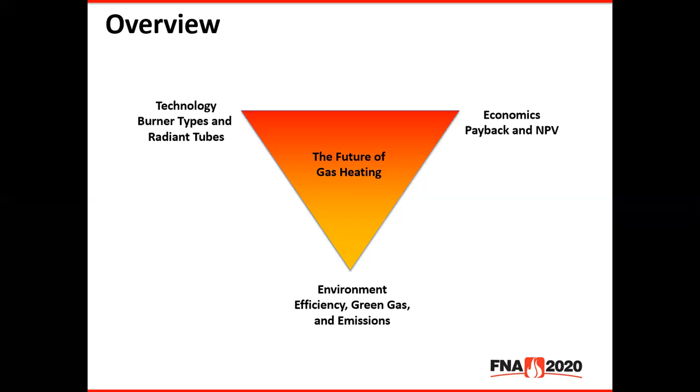Here we have a graph showing combustion efficiency as a function of exhaust gas temperature. For a direct fired burner, exhaust gas temperature is equal to the furnace temperature. For a radiant tube burner, exhaust gas temperature represents the temperature inside of the radiant tube, which is always hotter.

So if we look at the first curve on the bottom, labeled epsilon equals 0, this represents a cold air burner with no combustion air preheat. If we choose a random temperature, such as 1,000 degrees Celsius, we can see that the best possible efficiency for this type of burner is approximately 50%. And that's assuming that everything is in good working order and properly tuned, which is often not the case with some of the older equipment that we see in operation.

Moving up to the curve labeled epsilon equals 0.4, this represents a burner equipped with a plug-in recuperator or a central heat exchanger. With this type of technology, combustion air is preheated to approximately 40% of the process temperature. So at 1,000 Celsius, efficiencies are generally in the mid-60s.

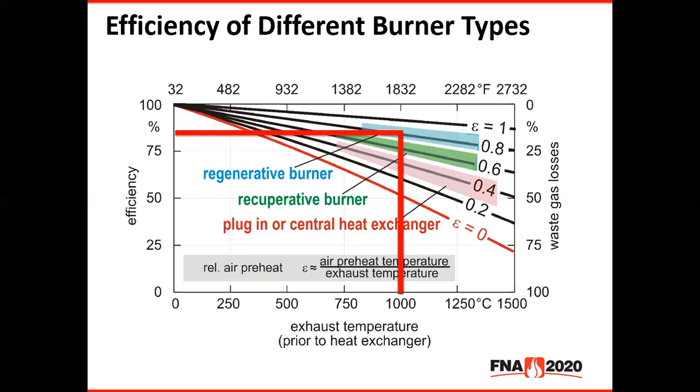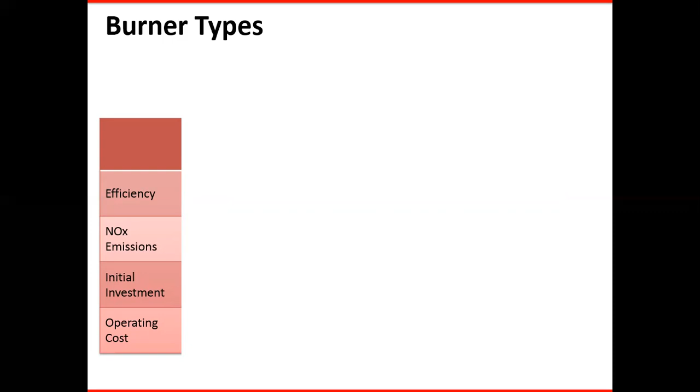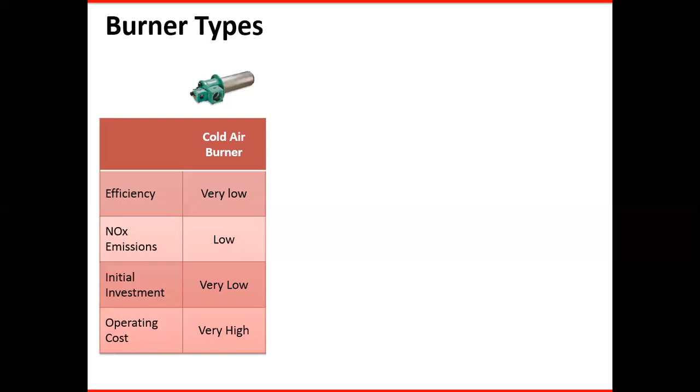Next, we'll compare and contrast some traditional burner types with the modern types. First, we'll look at a cold air burner. The efficiency is very low because there's no combustion air preheat, so consequently, the NOx emissions are also low. The initial cost of the investment is very low because it's simple technology, but the operating cost is very high due to the lack of efficiency.

Next, we'll look at a hot air burner. This happens to be a type equipped with a plug-in recuperator. Due to the mild combustion air preheat, there is some improvement in efficiency, but it is still relatively low. However, NOx emissions are now rather high due to the combustion air preheat. The initial cost of the investment is relatively low, but the operating cost is rather high since the burner is still rather inefficient.

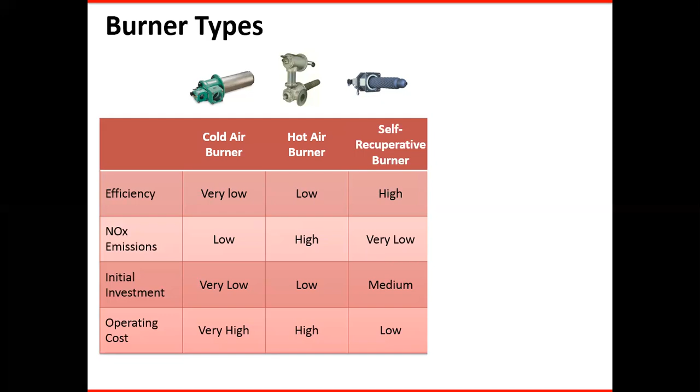Next, we will look at a self-recuperative burner. With this design, the recuperator is an integral part of the burner. It sits directly in the wall of the furnace, which helps to minimize heat losses to the surroundings. So the efficiency of this burner type is high. The NOx emissions can be high, but with proper NOx reduction technology, they can actually be very low. The initial investment is medium, and the operating cost is low due to the high efficiency.

Now we'll look at a burner type that slots in between a traditional self-recuperative and a self-regenerative burner. This burner is actually a self-recuperative type, but it's referred to as gap flow. So instead of having one large heat exchanger, there are many tiny heat exchangers, and this roughly triples the surface area for heat transfer. So it's possible to achieve efficiencies close to that of a regenerative burner, but in a less complicated and somewhat less expensive package.

So the efficiency of this burner type is very high, while the NOx emissions are still very low due to the use of appropriate NOx reduction techniques. The initial investment is high, but the operating cost is very low due to the high efficiency.

Finally, we will look at a self-regenerative burner. Traditional regenerative burners operate in pairs. One burner fires while the other exhausts, and the exhaust products travel through a bed of ceramic media, which serves as a heat storage mechanism. Then when it's the other burner's turn to fire, cold combustion air passes through the bed of media and absorbs the heat from it.

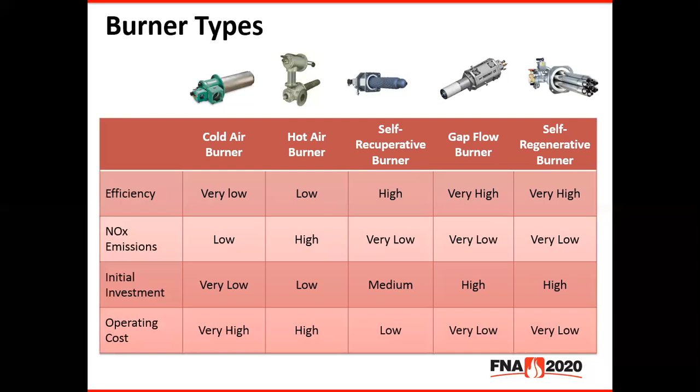Next, we'll look at some modern recirculating radiant tube types. The first is the single-ended radiant tube, and the tube pictured here happens to be a ceramic type. It's constructed from reaction bonded silicon carbide, or SiSiC. This material has twice the heat flux capacity of an alloy, so it can withstand 110 BTU per hour for every square inch of surface area, as opposed to about 55 BTU per hour per square inch for an alloy.

This material does not sag, creep, or distort. It's not required to rotate the radiant tube to counteract sagging, and it's not required to support the end of the tube. Not only is it not required, we insist that you not try to support the tube, because the furnace refractory will expand and contract at a different rate than the reaction bonded silicon carbide, and you could risk cracking the tube. So it should simply be cantilevered inside the furnace, like you see in the diagram.

With a single-ended radiant tube, whether it be ceramic or alloy, it's necessary to use inner tube segments to define the flow path for recirculation.

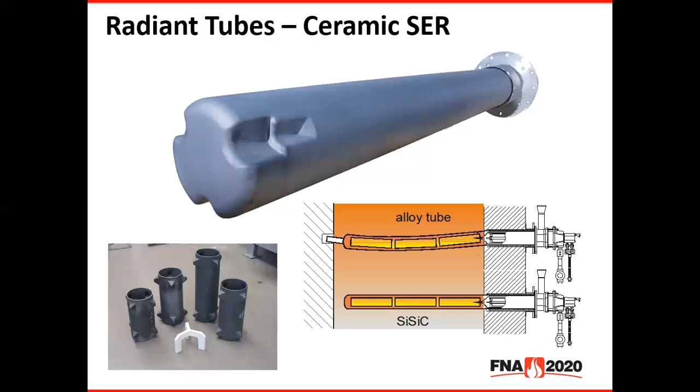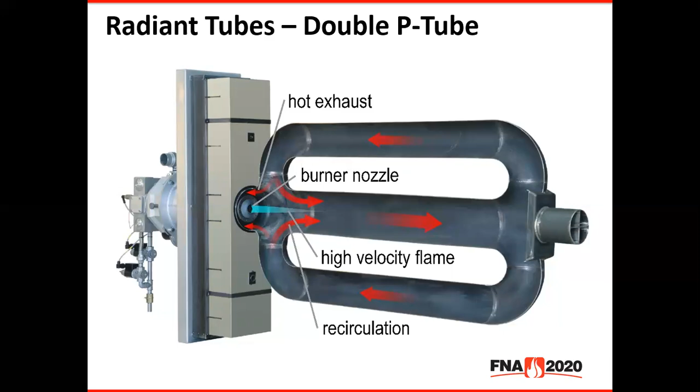Next, we'll look at a temperature uniformity comparison between some conventional tube types versus the modern recirculating radiant tube types. These tests were conducted at the WS laboratory in Renningen, Germany. They placed thermocouples 6 inches apart on each leg of each tube, and the goal was to measure the maximum temperature differential: where it occurred, and how large it was.

First, they tested a W tube, and they found that the maximum delta T occurred in the first leg, and it was approximately 270 degrees Fahrenheit. Next, they tested a U tube, and they saw a slight improvement with a max delta T of approximately 225 degrees Fahrenheit.

After that, they tested the P-type tubes, and they saw a dramatic improvement: delta T max was only about 90 degrees Fahrenheit, due to the internal recirculation inside of these radiant tubes. Finally, they tested the single-ended tube, and the results were the best by far: delta T max was only about 35 degrees Fahrenheit, due to the fact that the recirculation mechanism is compressed into a single leg.

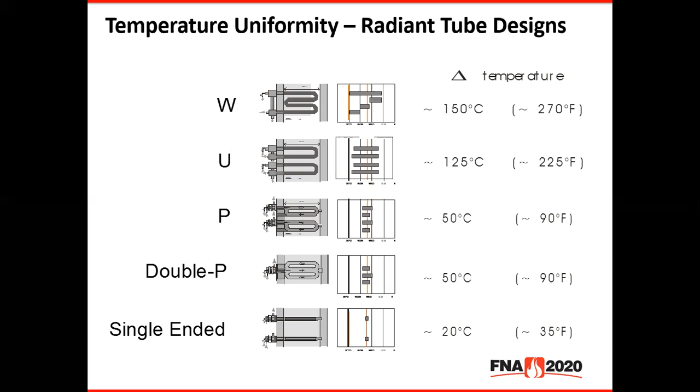Traditionally, there's been a trade-off between efficiency and NOx emissions. In order to achieve high efficiency, it's necessary to preheat the combustion air to high temperatures. This leads to high peak flame temperatures, which are the primary driver for thermal NOx formation. It's an exponential function, so as flame temperatures and furnace temperatures increase, NOx can start to take off very rapidly.

There are a number of techniques which have been around for many decades to help reduce NOx. Some of those are fuel and air staging, which is really the same concept, but you're just playing with a different leg of the fire triangle, fuel versus air. With air staging, which we use in many of our burners, you bring in a portion of the air, mix it with all of the fuel, generate a partial reaction, and release some heat. Then you bring in the rest of the air a little further downstream to complete the reaction and release some more heat. So you're spreading the heat out instead of concentrating it all at one point. This helps reduce peak temperatures and therefore lowers NOx emissions.

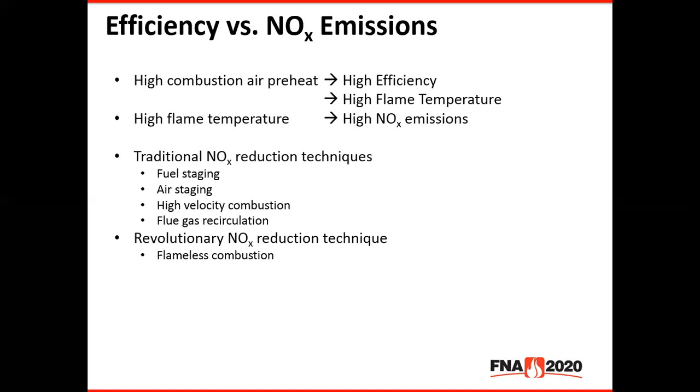The gas and combustion air are pre-mixed with recirculated exhaust products, and a spontaneous reaction takes place, which produces no visible flame. By eliminating the flame from the combustion reaction, peak temperatures drop dramatically, and therefore NOx emissions are suppressed to a fraction of the level possible with the other NOx reduction techniques discussed previously.

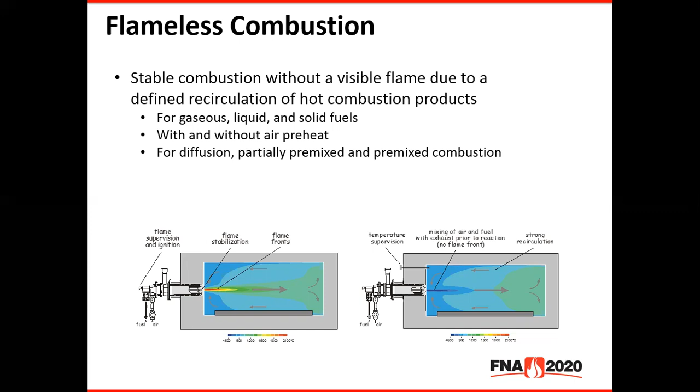Drastic NOx reduction is the primary benefit of flameless combustion, but there are a couple of other advantages as well. By eliminating the hot spot at the tip of the burner, thermal stress is reduced at that point, meaning critical components such as nozzles and electrodes will last longer. And while the temperature uniformity of these modern burner types is already very good due to the high velocity combustion, pulse firing, and internal flue gas recirculation, it's going to get just a bit better by the elimination of that hotspot.

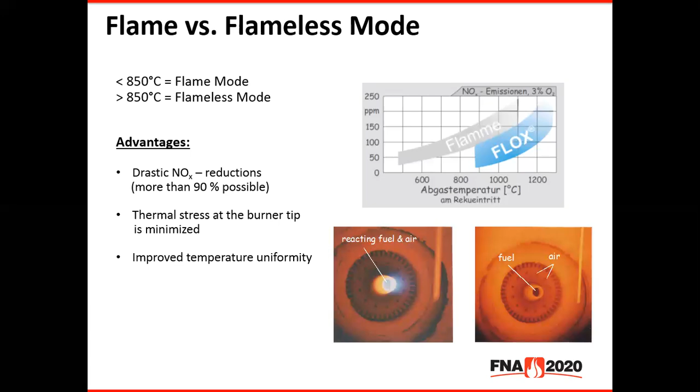Next, we will talk about the move to green fuels.

This graph shows projected specific CO2 emissions over time. As you can see, natural gas combustion currently produces less emissions than electricity. Emissions from the generation of electricity are significant, but they occur upstream at the point of production, so they are frequently overlooked by the end user.

As the graph also shows, we will approach the physical limits for combustion efficiency in the next 10 to 15 years. After that point, further reduction in CO2 emissions will only be possible by the movement to green fuels.

Electricity will also become greener over the next 20 to 30 years, but it is by no means a foregone conclusion that the future will be all electric. Only chemical energy provides unique advantages such as high availability, high energy density, and storage capability. So we feel that chemical energy will be an important part of the green future.

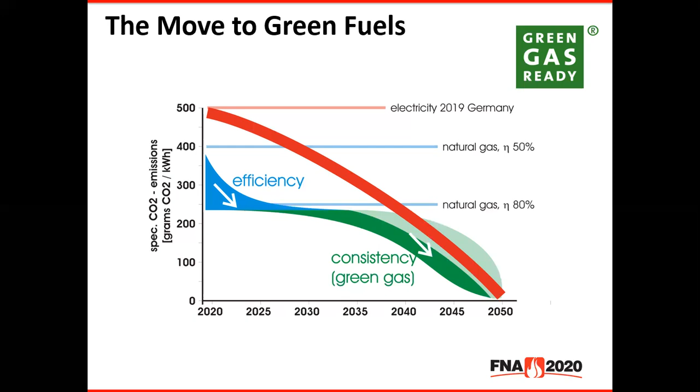Of course, no one knows for sure which energy carrier will play the dominant role, so we all need to be prepared for whatever it will be. At WS, we are currently delivering burners that operate on hydrogen and ammonia, and we will continue to develop new combustion technology to meet future fuel demands.

Now we'll look at a brief economic example. In North America, companies typically look at payback time when evaluating the viability of an investment. Payback time is quite simply the time for the initial investment to be paid back, and that's usually as a result of the fuel savings.

However, we think there is a much better tool for evaluating the viability of an investment, and that would be net present value. It's the sum of discounted cash flows corrected to today's dollars, and in our case, the NPV depends mainly on the generated fuel savings, the initial cost of the investment, the assumed interest rate, and the assumed lifespan of the equipment. Quite simply, the investment with the highest NPV is the most advantageous.

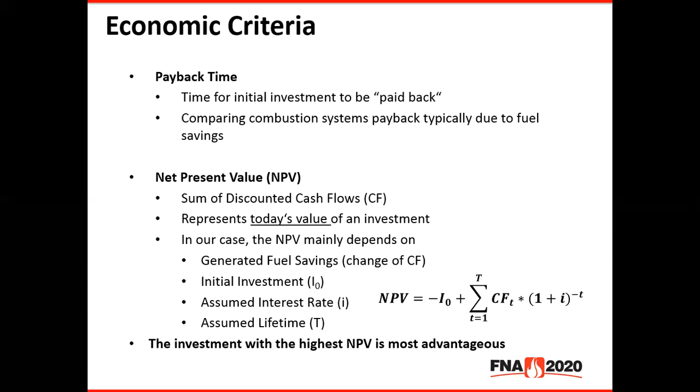So now we'll look at the example. Assume that a company is planning to purchase a new furnace, and the furnace manufacturer has offered a base package and 2 option packages. The base package consists of cold air burners installed in U-tubes, and this furnace is going to operate at around 1650 Fahrenheit, so the assumed efficiency is approximately 55%. As we said, this is the base package, so there is no additional investment.

Now, option package 1 consists of adding plug-in recuperators to the burners and U-tubes. This leads to an improvement in efficiency, and the expected efficiency of this package is approximately 65%. The additional cost for this option is $20,000, and the calculated payback period is 1.33 years.

Now, option 2 is a high efficiency alternative. It consists of replacing the base equipment with self-recuperative burners installed in P-tubes. The expected efficiency from this option is approximately 83%, but the additional investment cost is $80,000, so the calculated payback period is 2.35 years.

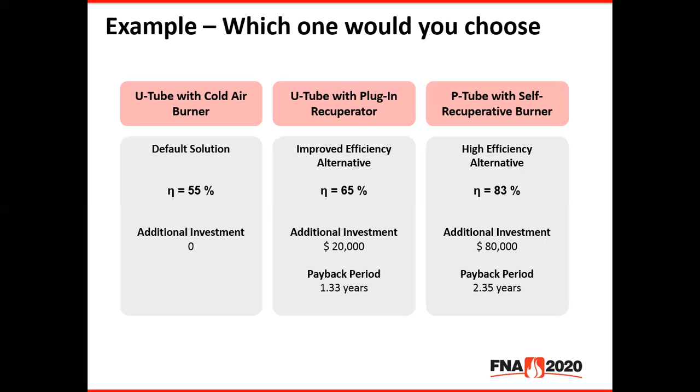So which option would you choose? The knee-jerk reaction might be to go for option 1 because the payback period is shorter. But if we evaluate this from the standpoint of net present value, we can see that even over a very short and conservative assumed lifespan of 15 years, the net present value of option 2 is over twice that of option 1. So the high efficiency alternative is clearly the better investment.

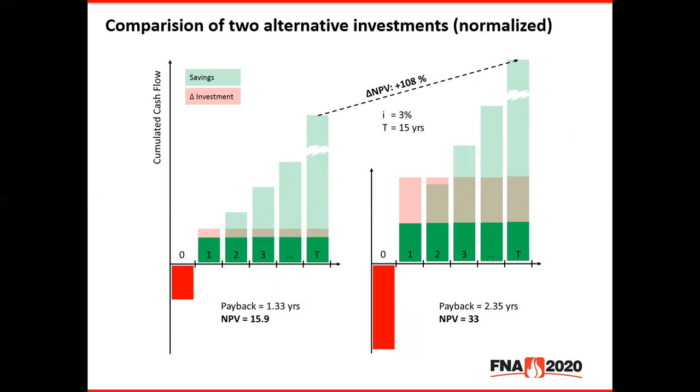In fact, if we assume a gas cost of $3.50 per 1,000 cubic feet, a furnace net input of 3 million BTU per hour, and an annual operating cycle of 6,000 hours per year, we see that the plug-in recuperator option leads to an annual fuel savings of a little over $17,000 per year and a 15-year lifetime savings of a little over $262,000,

which sounds pretty good. But if we look at option 2, the self-recuperative option, we see that that leads to an annual savings of over $40,000 per year, or over $607,000 over the lifetime of the equipment. And keep in mind, this example is for a relatively small furnace. So as inputs increase and as lifetime increases, which is likely for this type of equipment, the fuel savings become even more significant. So the moral of the story is payback period on its own is not a sufficient tool for making investment decisions. A complete analysis is necessary to make a well-founded decision.

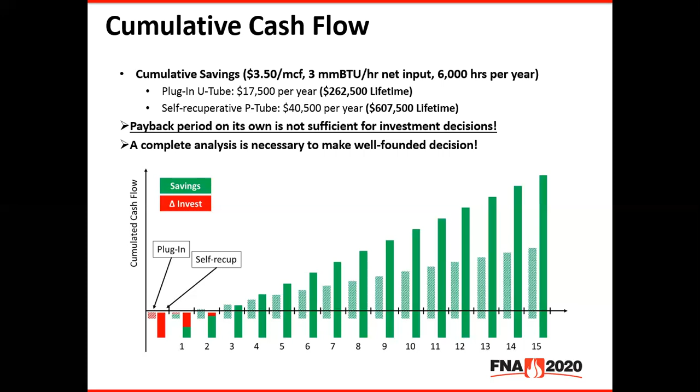So in conclusion, there are a variety of burner types available with varying levels of complexity and efficiency. Combustion air preheat is the most effective method to increase combustion efficiency. Flameless combustion enables low NOx with high efficiency, so we can have the best of both worlds. We will approach the physical limits for combustion efficiency within the next 10 to 15 years. After that point, further reduction in CO2 emissions will only be possible by the movement to green fuels.

The investment in high efficiency burners makes sense economically, even when gas prices are low, and the lifetime savings due to the higher efficiency are huge, often greater than 10 times the additional investment. And finally, payback period on its own is not a sufficient tool for making investment decisions.